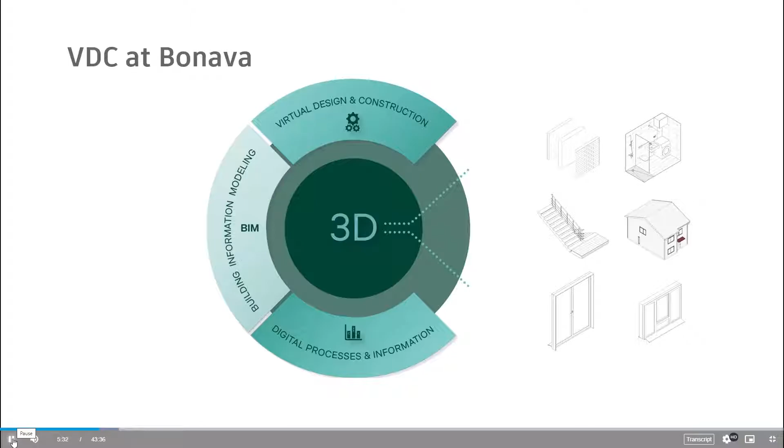An important concept we have in Bonava is a Bonava part. So what exactly is it? It is a predefined element which originates in Revit as a 3D model and later is given a unique identifier that we call a Bonava part ID. In this slide you can see it can be a single element, such as a wall, or an assembly of elements, for instance stairs. It can also be a whole predefined room, like a bathroom.

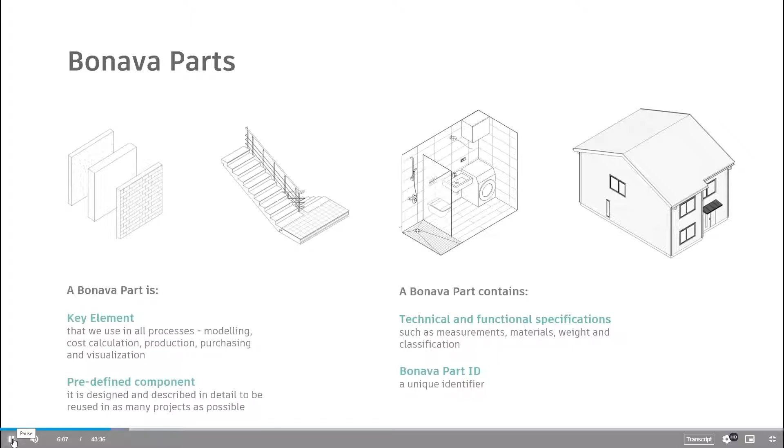And all of these elements make a building system. So each Bonava country has their own collection of Bonava parts that, together with descriptions of their applications and technical solutions, make a building system.

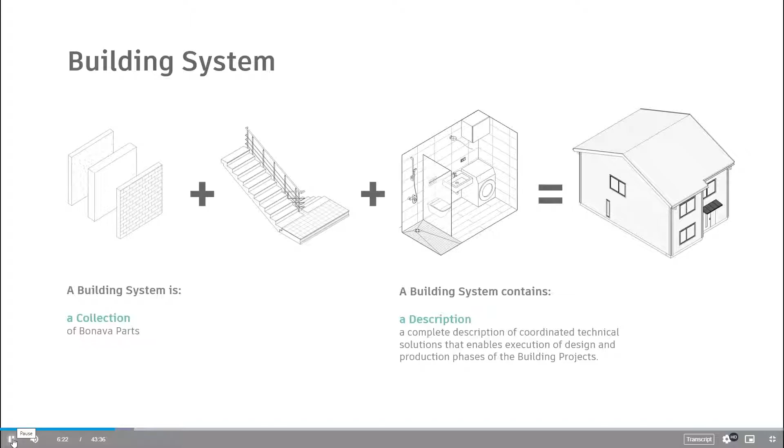As mentioned, a Bonava part is a predefined element, and with the help of the Bonava part ID, it is recognized in other systems we use for modeling, visualization, cost calculation, purchasing, and production.

So the parts are defined, but what varies is how they are combined. And this is when generative design comes into play.

Even though we have predefined many elements, to such a degree that we already have parts for single-family housing units, the complexity of designing a building, or more so a neighborhood, still remains. There are just so many aspects to consider and take into account, and correlations between them might not be apparent, but are crucial for a development project.

In the traditional design process, we design first and get evaluations of the proposals afterwards. In that way, we can do a comparison of a few alternatives. What generative design allows us to do is to look at multiple results first, see how various aspects affect the design and those results, and then pick the ones that best fit our goals and requirements.

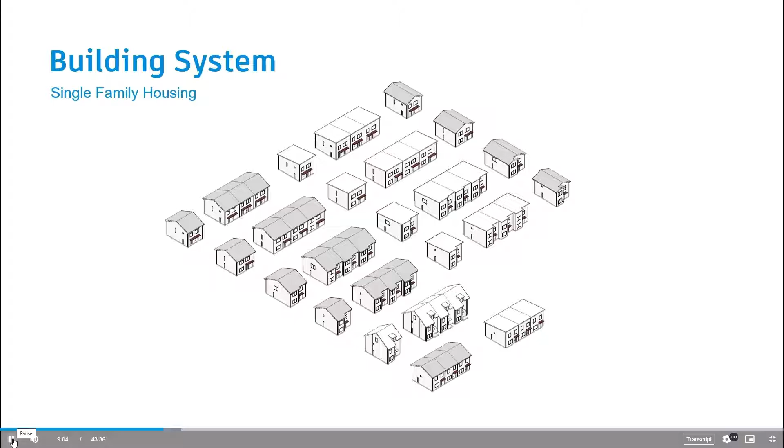Since the houses are defined, the variable that remains flexible is the site. So our input is the site itself, together with a Bonava part, and together with certain rules and regulations for how we can build and how we can combine the parts.

Based on these three inputs, we created an algorithm that shuffles the Bonava parts and provides us with a wide range of possible site layouts.

Each and every configuration is evaluated based on certain criteria, and Eric will guide you through all of this later on, but for now, let's have a look at the inputs, starting with the rules and constraints.

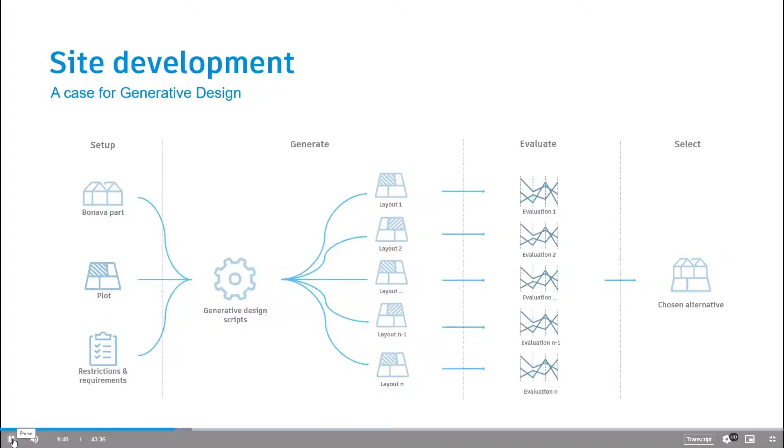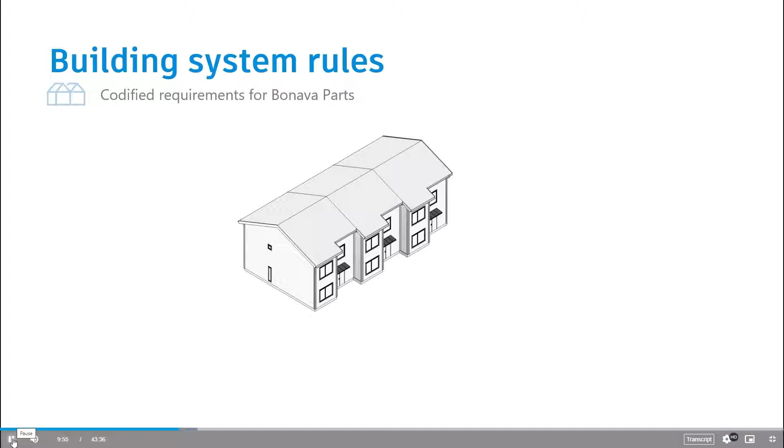As previously mentioned, the Bonava parts are predefined, but we also need to predefine how we can combine these parts. In our case, we said no horizontal displacement is allowed; we can only have a vertical height difference of 0, 250, or 450 millimeters between two houses in a row.

We also need to specify how many houses we can have in a row, and in this case we said approximately 3 to 6 houses in a row. So that covers the rules and regulations related to the Bonava parts themselves.

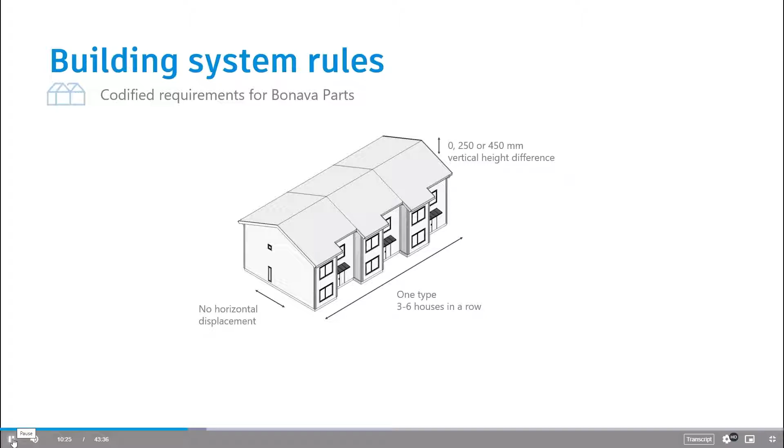But we also need to specify how these parts relate to the neighborhood and to the site. So we specified the dimensions of the gardens: the front yard, the backyard, and we also place access points, because we need to specify that point in order to place the houses on the site.

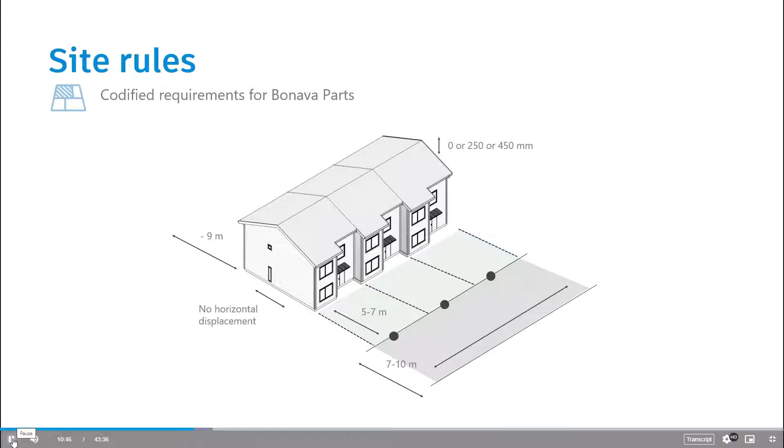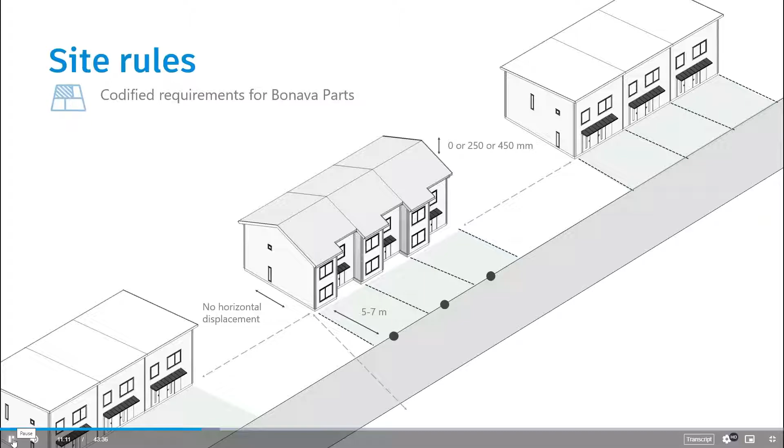Due to certain regulations in Sweden, related to fire regulations and accessibility rules, we also need to specify the distance between two house rows. So we need to specify rules on certain levels, but after we've done that, we can bring that knowledge and these numbers into the next step, which is about the algorithms.

We developed this tool and workflow two years ago, before generative design in Revit was released. That is one of the reasons why we don't present a workflow fully integrated in Revit. Another reason, in line with our topic of connecting people and algorithms, is that we wanted to expose generative design for everyone within the organization, not only the Revit users.

In Bonava, we believe that we have so much knowledge from different disciplines, and we basically wanted all that expertise to be the input and the design to be our common output. Therefore, we are using a web browser for exploring the results.

In order to connect people and algorithms, we need to build trust in what the algorithm does. We need to ensure outputs similar to what we as humans would come up with. We discussed with architects, managers, design teams, project developers, and cost calculators how and why we design as we do, and we tried to translate this knowledge into algorithms so we could use it over and over again.

In order to assist the design teams and generate wide design scopes, the first step in the algorithm is to define the zone for generative design. We also define whether we have existing streets or where to connect new streets. Then we use the algorithm for street network generation, mainly done by Voronoi, but it could also be used by rectangular grids or boundary offset, depending on what kind of neighborhood you want to achieve.

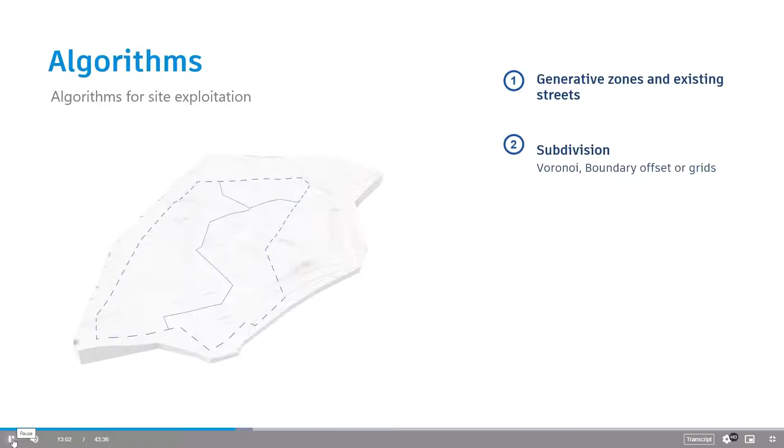Once we've created the basis for the network, the houses are placed recursively in the cells or parcels that appear. Each and every house is placed together with a front yard, a backyard, and an access point. The access points are then connected with lines, and a big graph is created, where the access point represents nodes and the line represents edges.

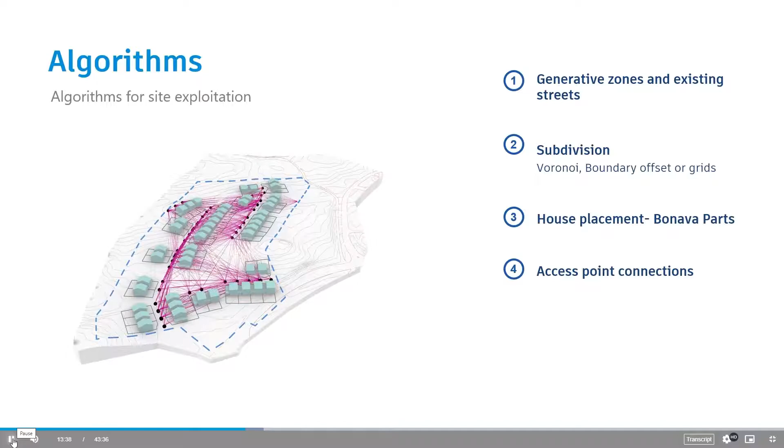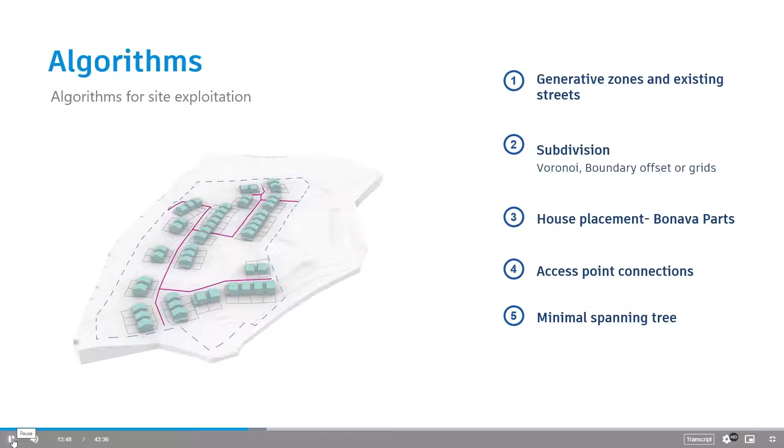Then we can move into graph theory and use something called the minimum spanning tree algorithm, and we use that algorithm to calculate the shortest path for connecting all of the nodes in the graph. So what we end up with is an efficient street network connecting all of the houses, connecting all of the Bonava parts.

So once we've done that, once we've defined the rules, once we've defined the constraints and we have the algorithm in place, the fun part starts.

We can now reuse the code written in C#, executed in Grasshopper. By just changing the input parameters and changing the seed a little bit, we can achieve a wide difference between outputs. We can create organic street networks or grid street networks, and thereby we end up with two very different appearances within a neighborhood.

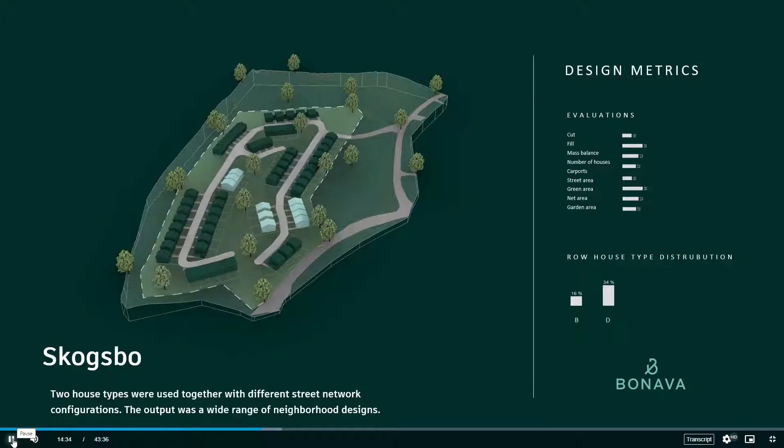So we generate one alternative and we store that in a database, but we can generate even more alternatives. In the end, we generate around thousands of alternatives, and our intention is to do this even before land acquisition.

So once we have created all these alternatives, we need a reliable way to know which ones of these are good and that we want to continue developing. We also need to know, for the alternatives that we do choose to develop further, what can be improved on those alternatives. And this is where the evaluation step comes into the process.

So when we first started this initiative, we sat down in a workshop and created 6 different categories of goals. The first category is the number of houses, or the house distribution - basically how many houses of each type we have in the neighborhood, and the distribution of different lengths of house rows, so the amount of pair houses and the amount of longer house rows.

Then we have the ground data, and that is cut, fill, and mass balance - the amount of volume you would need to dig to build a specific proposal, and how much you would need to fill in the area. The difference between these two is the mass balance.

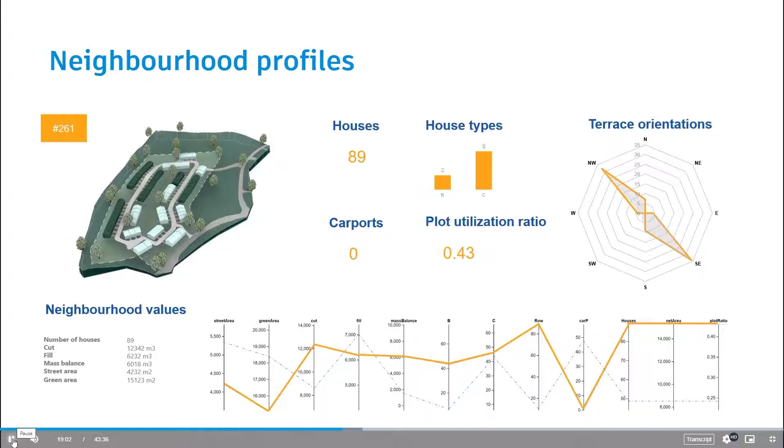By doing this, it's easy to see how they correlate to each other. Especially when you add more and more alternatives, you can actually see trends starting to form, and you can see that certain parameters might have a positive or negative correlation. The most obvious example is probably the cut and fill and mass balance, that those 3 are connected in a certain way. But it can also be seen in more or less obvious parts of the diagram, where certain parameters that you think wouldn't be correlated actually have a strong correlation.

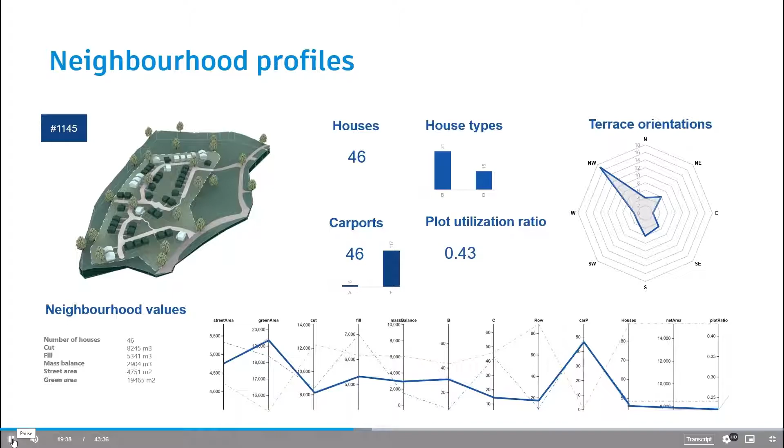What we do is that we actually use a lot of different alternatives at the same time, and we display these alternatives in a web-based design exploration tool called Design Explorer. So we visualize lots and lots of different alternatives at the same time to be able to see how they actually correlate to each other and what advantages and disadvantages certain alternatives might have.

And on Design Explorer, it's also easy to see that these alternatives actually correspond to the cards that we talked about earlier. Here, for example, the first three parameters are the groundwork parameters, and then we have a couple of parameters connected to the house data, the amount of houses for each of the different house types, and the number of pair houses and row houses. And then we have the street data parameters and so on.

So when you see this tool, I think the obvious question to ask yourself is, who is this tool actually for? Who's going to use this tool? This was actually the same question that we asked ourselves when we first started this initiative, and we sat down and tried to think about the user for what we were developing.

Our realization was that we have a lot of competences within the organization, within different disciplines, and that every discipline has their own priorities, and every person within that discipline has their own priorities. There is absolutely nothing wrong with that, but sometimes it might be hard to see beyond the parameters that affect what you are working with.

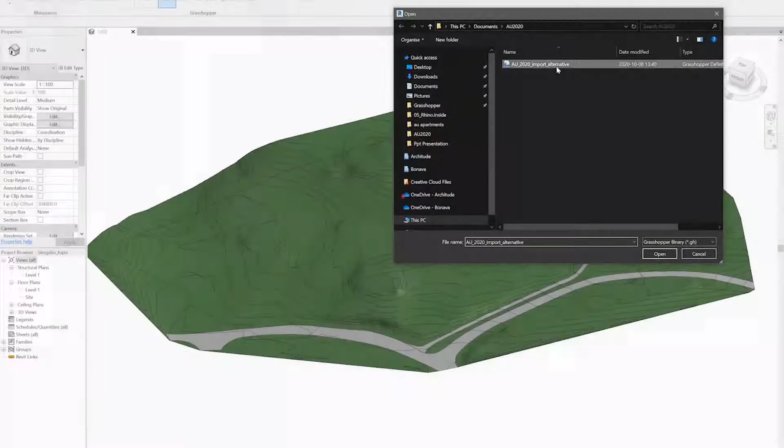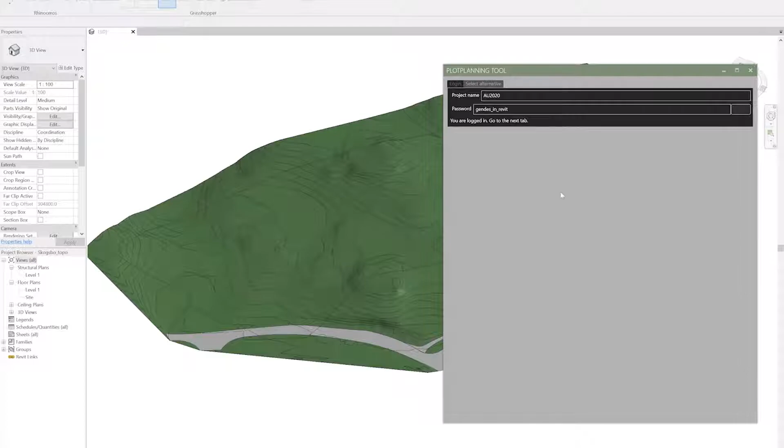We start by opening up a custom script from within Revit. We've written the script so that you don't need to actually interact with Rhino or Grasshopper, but it just brings up a window where you can log into your project page with the specially created username and password for that specific project. Then you can choose the alternative ID to see what that alternative actually looks like in 3D. First, it brings the alternative up inside the pop-up window, and you can pick another alternative you want to have a closer look at.

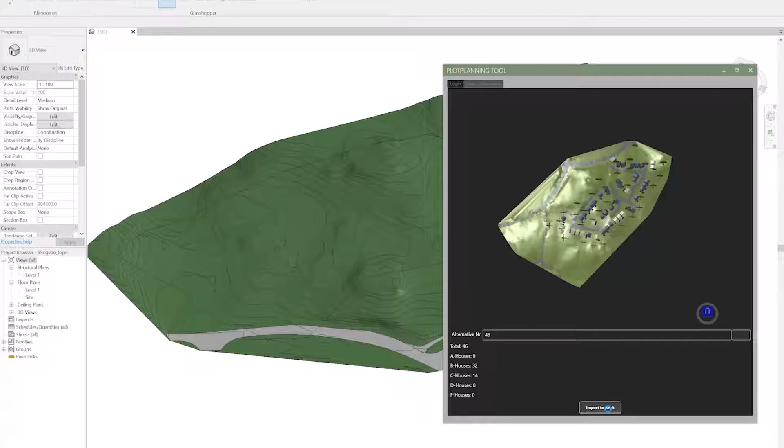It brings in all the data, both the geometry and the evaluation data. So you can see here, for example, the number of different house types you have in that particular alternative. Then when you click import to Revit, it brings all the geometry into Revit, and you can keep on developing the alternative further from there.

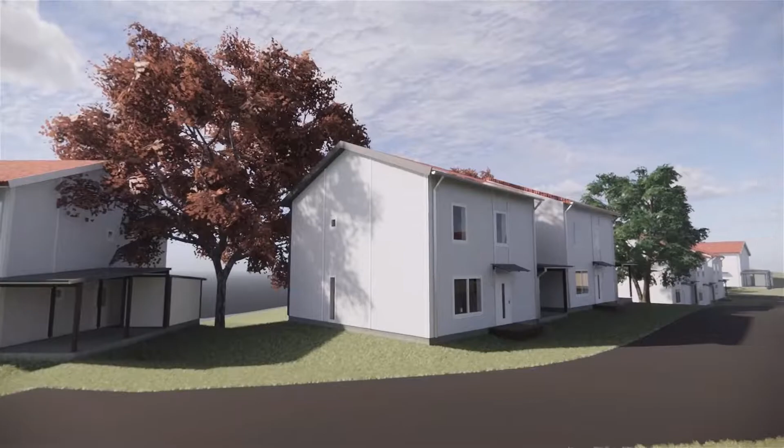So this is how a model might look after the import. We still have to do some manual adjustments for house placement, but most of it will go together with the landscape design, when we also add common buildings and areas, design streetscape, and add landscape elements such as playgrounds, lighting, furniture, planting, and so on. So what you can see are about 200 Revit families, or as we call them, Bonava parts, that represent a single family house type unit.

We use them in the planning phase, but after that has been finalized, we record their coordinates and use a set of scripts to link actual building models. And in those, we have already prepared all the documentation necessary for building permits and also material for the sales and marketing department.

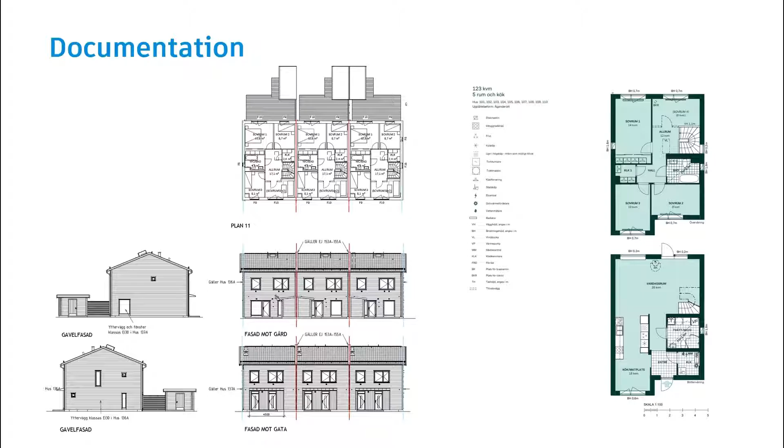As Anita just mentioned in the beginning of the presentation, Bonava develops single-family housing and multifamily housing projects. You have now seen how we implemented generative design on single-family housing. So let's now have a look at how we approach generative design within multifamily housing development.

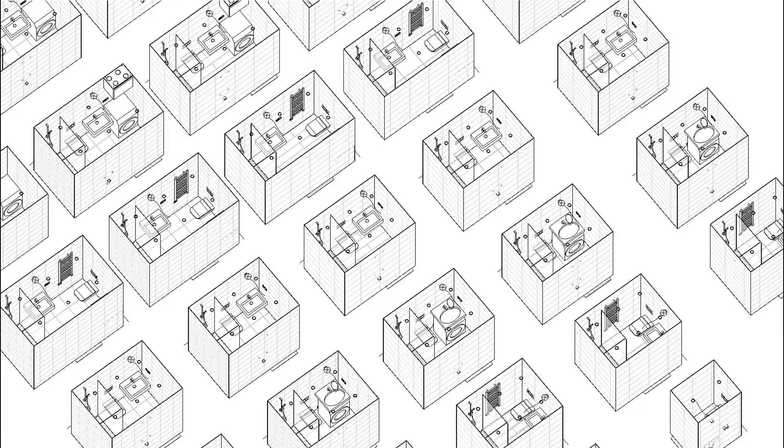Just as Anita mentioned, a single-family house is represented by a Bonava part. But that is not really the case for multifamily housing. We are not working with type houses. Instead, we have predefined parts but in other scales. It could, for example, be a predefined bathroom or a kitchen module, but it could also be a stair or a wall, as mentioned in the beginning of this presentation.

Since the parts and the sizes of the parts vary a lot between single-family housing and multifamily housing, one can understand that the design processes work differently for these two cases. Since everything within a single-family house is predefined, we do not need to deal with the interior while placing the houses on the site. However, for multifamily housing, we do need to take two perspectives into consideration at the same time. We need to deal with the exterior perspective, meanwhile we ensure the internal requirements and qualities are being met. This is normally embedded in the architect's expertise, but can in certain cases result in complex and quite time-consuming processes.

Since there are so many aspects to consider, we are applying generative design and algorithms as a way to assist the human brain, facilitate decision-making, and in the end streamline the planning.

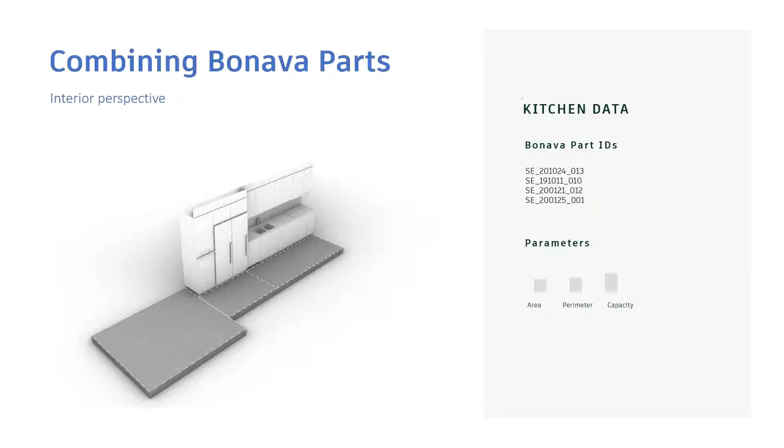The way we are approaching this complexity is by dividing it into two parts and dealing with the interior and the exterior challenges separately. As mentioned, we have predefined kitchen modules, and by placing these modules in different ways, we end up with several spatial representations of kitchens. It could be a parallel kitchen with a dining on the short edge, it could be an L-shaped kitchen with a dining table in the middle, and so on.

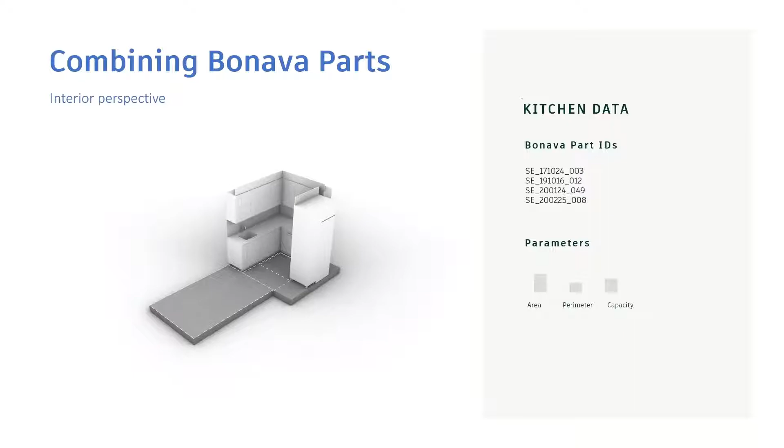So by combining kitchen modules, we can, with the help of algorithms, create possible room shapes suitable for our Bonava parts. We can do the same things for the bathroom, but in this case we are not shuffling the items inside the spatial representation. We are working with predefined bathrooms, and we already know where each and every item inside the bathroom is placed. Let's keep that in mind and go to the next scale.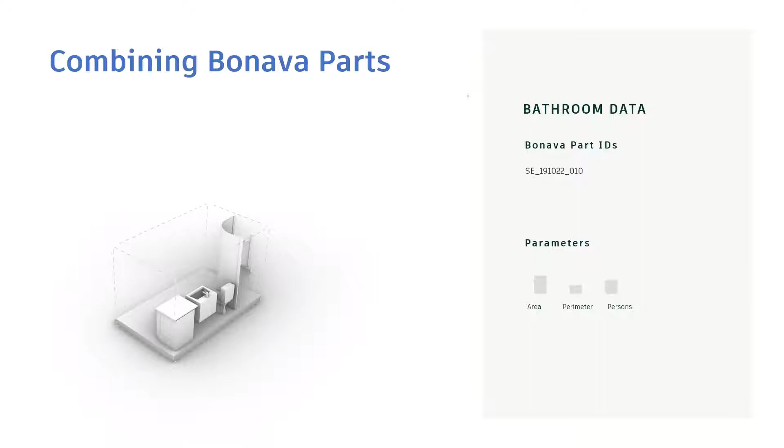Let's move up one step and have a look at the living unit perspective. You can create living units, aka a floor plan, in a lot of different ways, and we have been looking at procedural algorithms for subdivision. We've been investigating neural networks and GAN approaches, but the approach we are currently investigating is to recursively place the rooms in order to make sure that everything fits and works together with the Bonava parts.

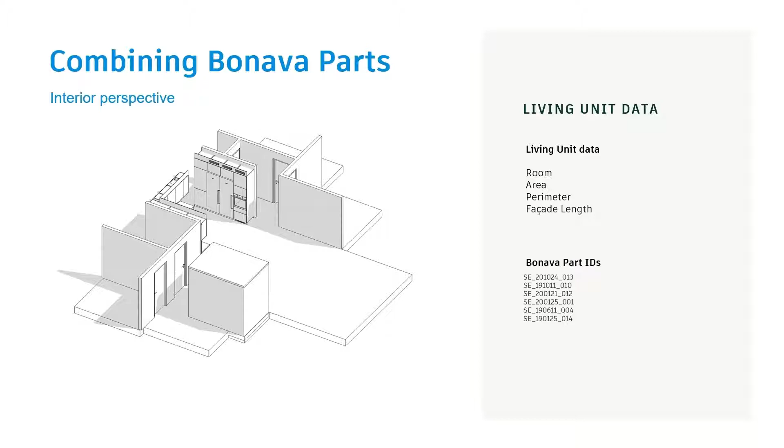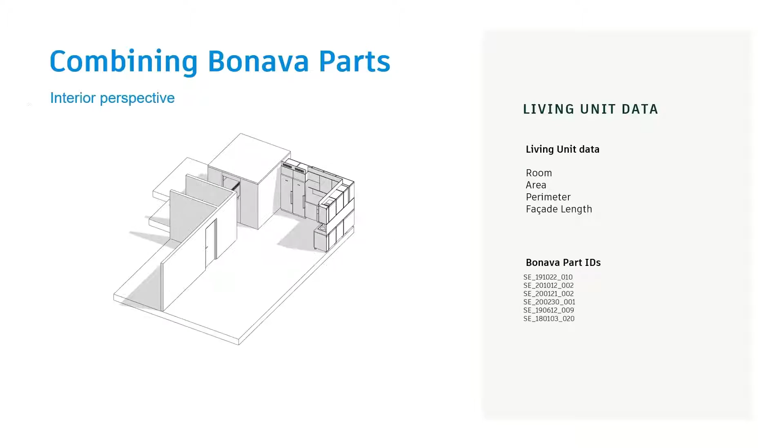So we are now working on an algorithm for combining predefined rooms according to certain rules. Of course, we are dealing a bit with graph theories here, since we need to take adjacency preferences and also circulation aspects into consideration. The work is still in progress and it's not perfect, but we still want to share our ideas in order to exchange knowledge and experience and open up for discussions.

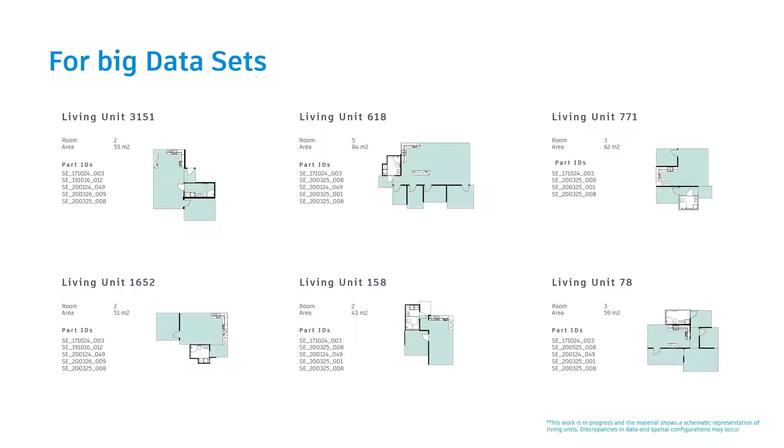But anyhow, what we are then doing is that we store every possibility of a living unit in a JSON format in a MongoDB database. We store the geometry, but also relevant metadata such as square meters, type of kitchen, type of bathroom, and how many people the apartment is suitable for. We build up a reference bank of possible units that we later on in the process can use for assisting us as humans in a complex design process.

So if we switch perspective and look at the exterior, we can use this dataset as an autocomplete tool. Once we subdivide the volumes, once we place the core functionality such as staircases and elevators, we can refer to the dataset and get information about the possible floor plans for a given apartment boundary. Of course, we are taking the entrance point and facade position into consideration as well, and we are currently working on the shape matching algorithm for finding the most suitable living unit for each and every container.

So to sum up, this is again a way of connecting people and algorithms. We are letting the computer do what it's best at: computing, storing, handling big data. We should see the rise of using algorithms and AI as a way of enhancing us, not replacing us. We are using algorithms here to assist the design team and in order to make more informed decisions. And we should see this as an evolution rather than a revolution.

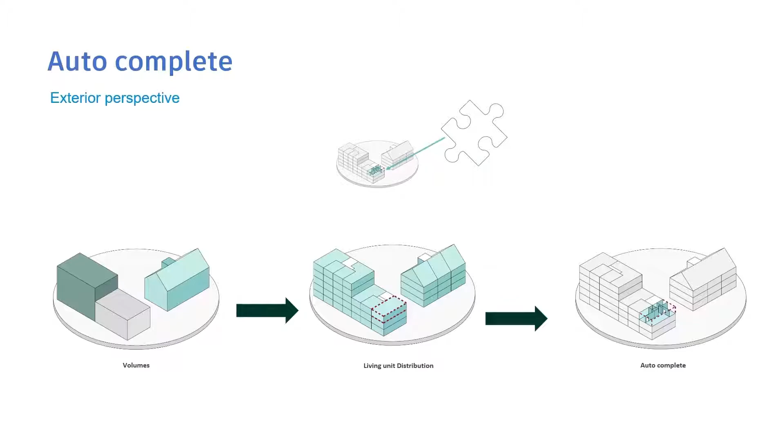So now you have seen what we have created so far. And let me say, there has been a lot of experimentation, trials and errors to achieve these results.

So what can we learn from that? First, it didn't happen in one day. There has been a gradual development of digital tools since Bonava was founded. We started simply with content creation and reuse of the same parts. We then looked into how we can automate some of these tasks by writing scripts and developing specific tools.

That would allow us to speed up standardized and repetitive processes. Last year, we looked even further and started to investigate generative design. We came out with developing tools for optioneering, and now we are looking into how to apply genetic algorithms for design optimization, or in other words, how to make those options better.

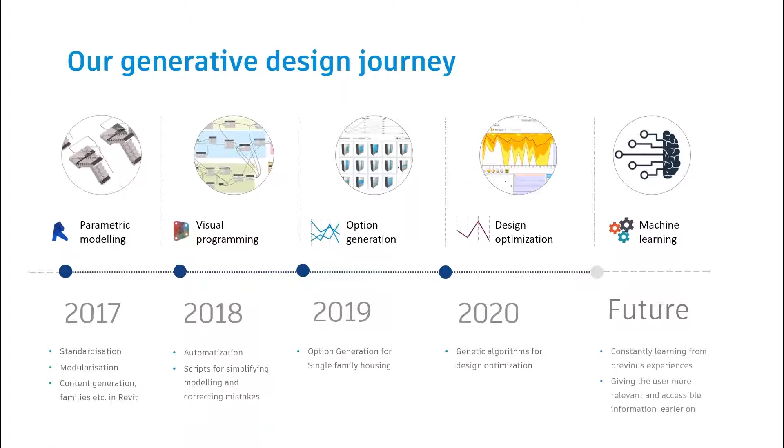But genetic algorithms might not be the only solution. Before we jump into next technological developments, we stopped and did some reflections, which in the end we could put into three categories. First, design. We noticed that generative design boosts creativity because the scripts might produce design alternatives that might not be obvious yet still perform well.

Also, it is fairly quick to produce many options, but even when the best one is chosen, the design is not final and still needs an architect to improve on it. But it is a rather good basis to start with.

And last but not least, we can also find ways to quantify soft values. In our case, those were sunny terraces. And now this aspect can also be brought to the discussion table, which leads to the next category: communication.

As Eric mentioned, now we can bring different disciplines together earlier. And because we can see the correlation between various results, it allows us to understand better why some discipline favors one option over the other. That makes decision making more transparent, and everybody has a holistic perspective of the project.

When it comes to technology, we realized that writing code for designing a site might not be the same as writing a script for automating a repetitive process. Even though fundamentals do not change, each site comes with its own unique challenges, and we had to customize code for it. On the positive side, it also pushed us to constantly evolve.

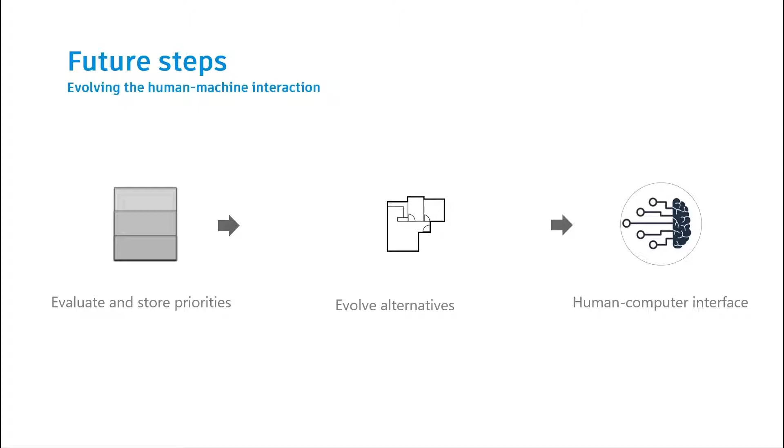So we are starting to approach the end of this presentation, but we have one last really important question to ask, and that is: what is it that we are actually creating when we are doing this? Is it an evil robot that just wants to take all the decisions for itself?

Or is it good to have a digital assistant that can help people with different backgrounds from different design disciplines to understand each other better and together take better decisions that result in better designs and homes for the customers? And I think we need to keep this question with us in every step of the way in the development to always take the right decisions.

And we like to think that what we're actually creating is this good-to-have digital assistant. And we try to do this by always having an ongoing discussion with people from different parts of the organization to hear what their experiences with the tool are and how they think we can improve it in the future. So ultimately, what we're trying to do is not only to connect people and algorithms, but actually connect people with algorithms. And I think today this is probably more important than ever, given the current situation in the world.

So lastly, I would like to thank you all so much for joining us here today to listen to how we're using generative design in the early stages here at Bonava. It's been a pleasure and a privilege to be part of this conference. And I think that together we have so much knowledge. I believe that by learning from each other, we can really change the housing game and create better lives for the many.